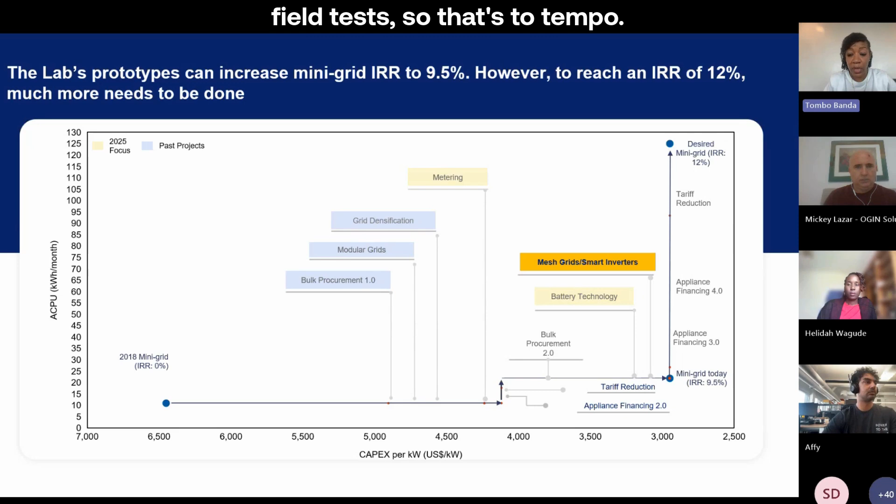So what do we do with all the data from the field tests that we conduct? We collect data from all these field tests: smart meter data, battery data, inverter data, survey data. And we conduct analysis on this data to give a real-world evidence-based view on what the impact of these various innovations is on the mini-grid business case.

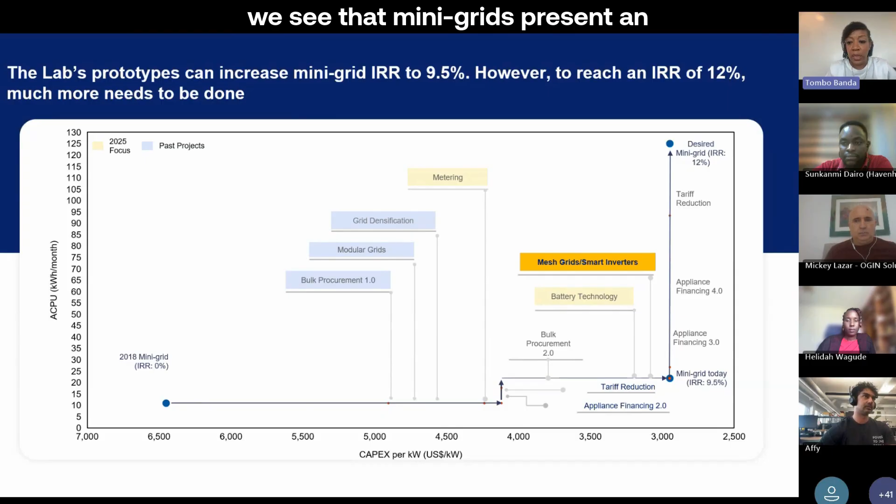Our most current analysis suggests that implementing all these various prototypes, including mesh grids, brings the mini-grid business case to an IRR of about 9.5% today, which is closer to our target of 12%. We have set a target of 12% so that mini-grids are on par with other infrastructure investments. So, while we're not quite where we need to be, we see that mini-grids present an opportunity for further improvement and bring us closer to a more lucrative business case overall. So today we hope to take you through our findings from mesh grids, and discuss how these might further impact the mini-grid business case. Thanks.

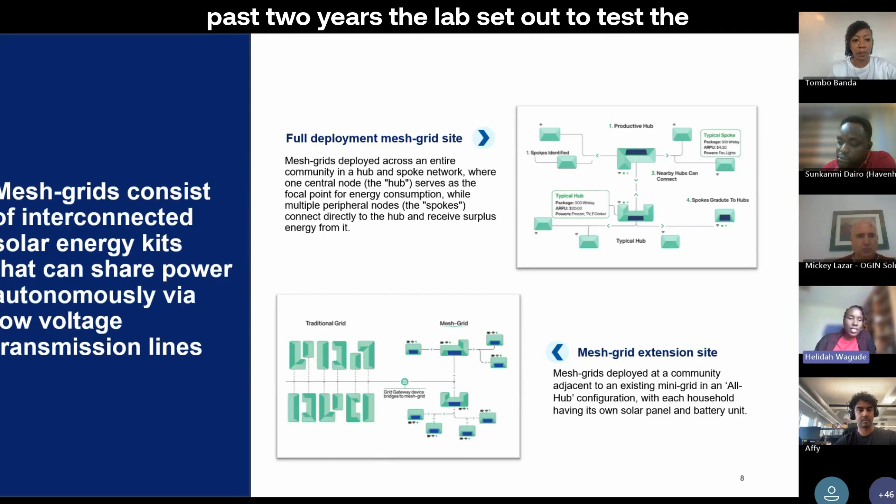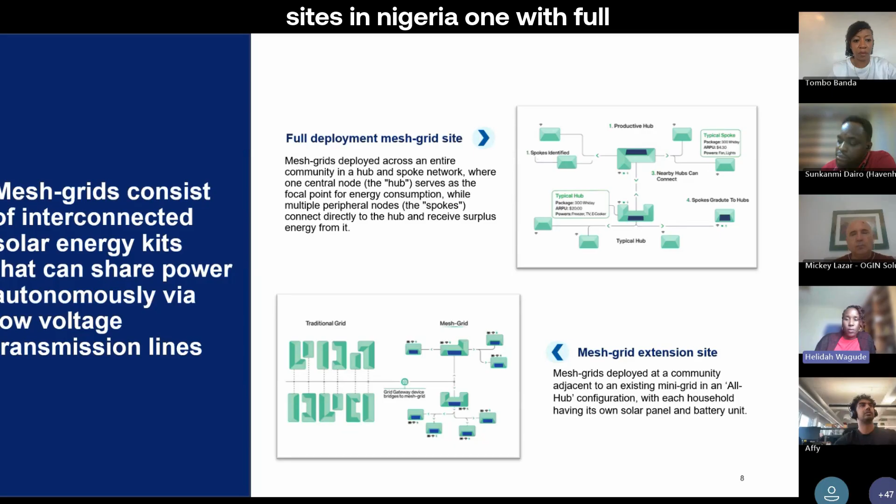I just wanted to take you through an overview of what mesh grids are and what they consist of. So in the past 2 years, the lab set out to test the technical and financial viability of mesh grids, and we compared them to mini-grid deployments of similar scale. So we ran pilots at 2 sites in Nigeria, one with full deployment of mesh grids across an entire community.

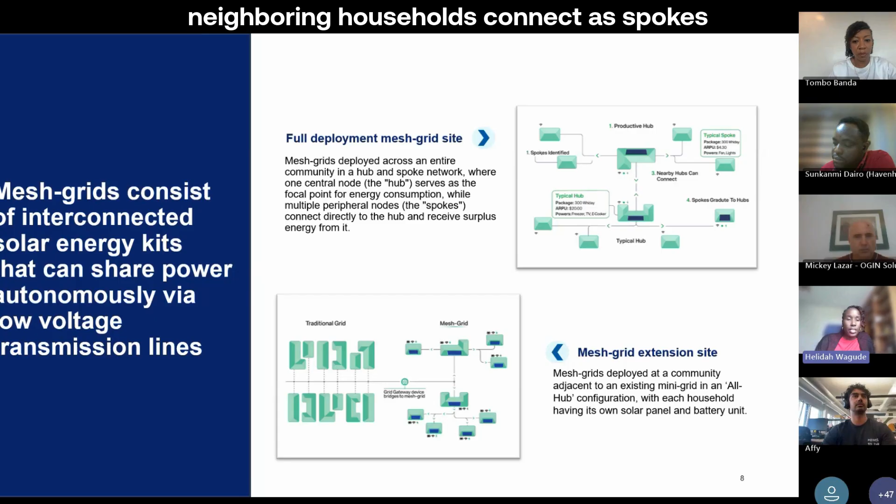And here we used a hub and spoke model where the hub serves as a central node and supports high energy users like shops and clinics, while neighboring households connect as spokes, as they typically use less than 1 kilowatt hour per day, mainly just for lighting and charging small appliances. Then the second site that was tested used mesh grids to extend access to a community at the edge of an existing mini grid, and each household had its own panel and battery system.

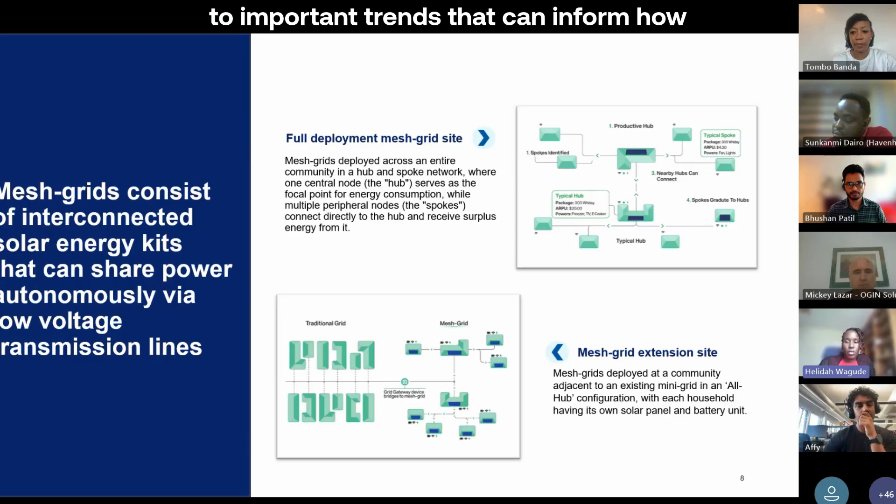While this is a limited sample size, the findings we felt pointed to important trends that can inform how developers, funders, and policymakers think about where and how mesh grids might be a viable solution. Both mesh grid sites were launched as alpha tests between 2023 and 2024. And over this period, the lab worked closely with the developers and technology partner to collect operational data, including ACPU, average consumption per user, average revenue per user, reliability, CapEx, and OpEx per connection. So these particular metrics were to better understand how mesh grids perform in practice.

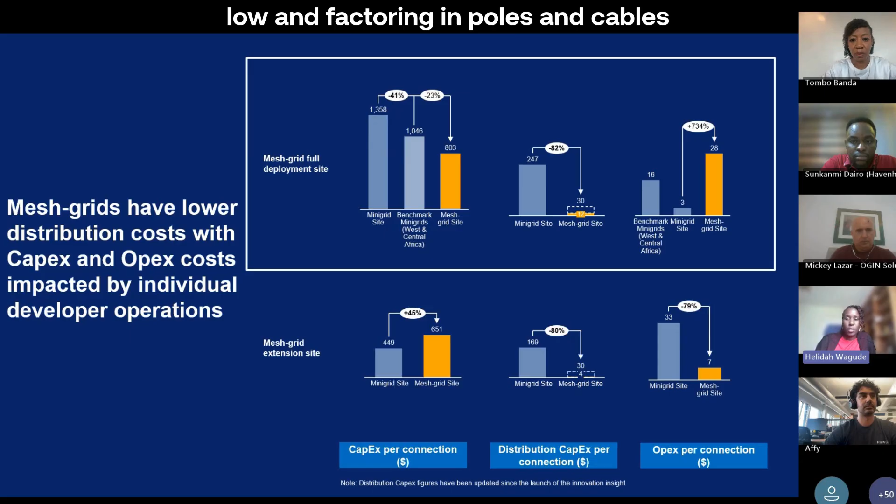So taking you through the findings of the different sites. At the full deployment site, CapEx per connection was lower than at the mini-grid site. And we also noted that it was 23% lower than mini-grid benchmarks in West and Central Africa. This is from the latest AMDA report. Distribution CapEx was also low, and factoring in poles and cables, the true cost is around $30 per connection. OpEx per connection was higher at this site compared to the mini-grid control, and this was largely because the site required dedicated maintenance resources, which hadn't yet been optimized given that it was a relatively new site.

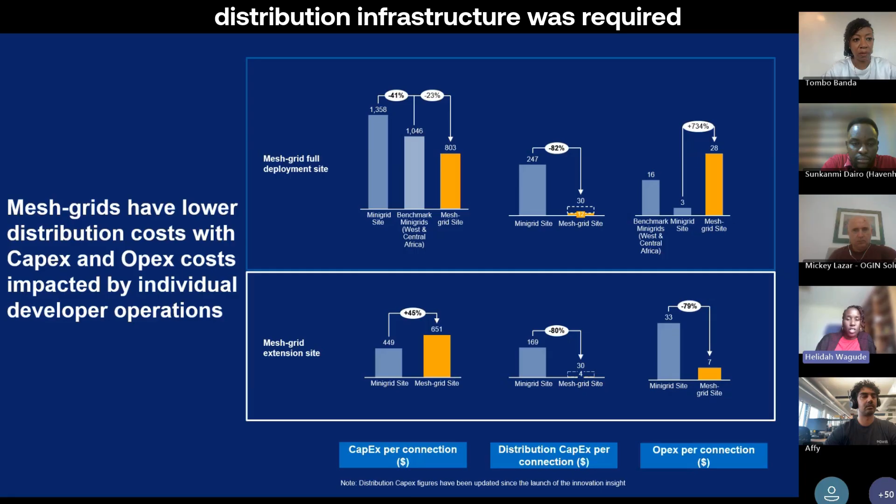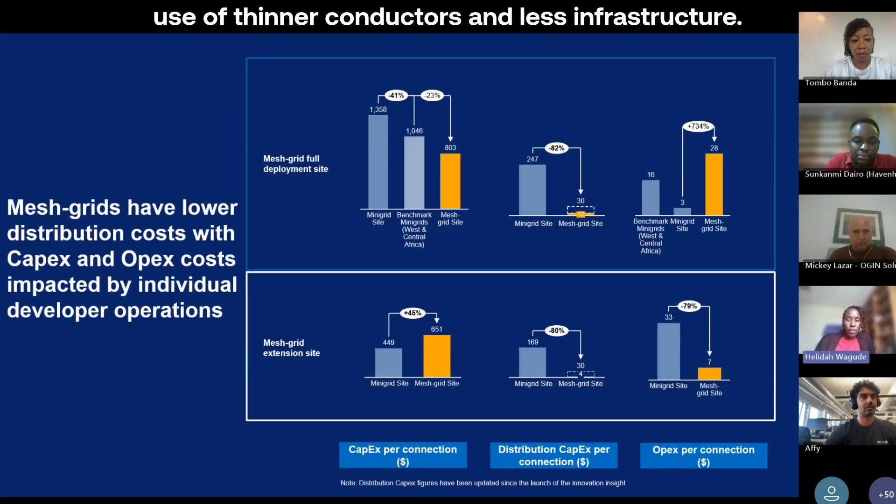In contrast, at the extension site, CapEx per connection was higher than at the mini-grid site, and this is because the mini-grid site already had existing PV and battery capacity, so only distribution infrastructure was required. The mesh grid extension site also had lower distribution CapEx, and this is driven by the use of thinner conductors and less infrastructure. OpEx per connection was also lower thanks to shared operational services with the nearby mini-grid, considering this was the same developer.

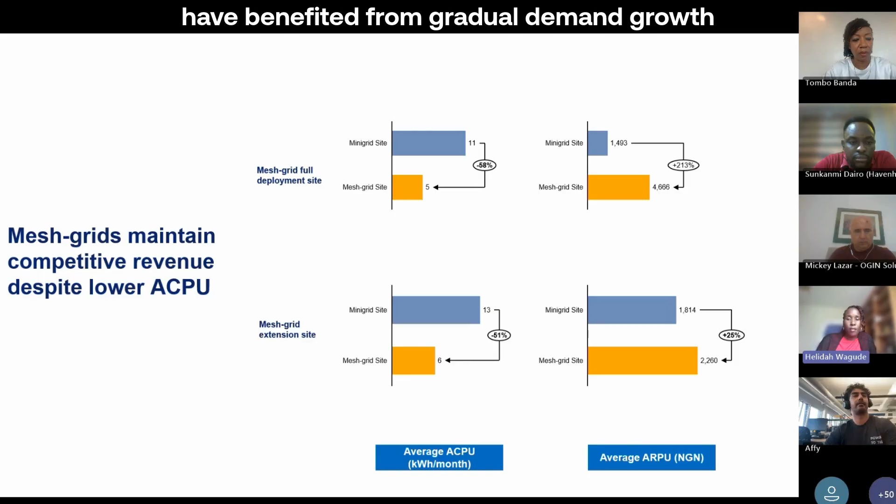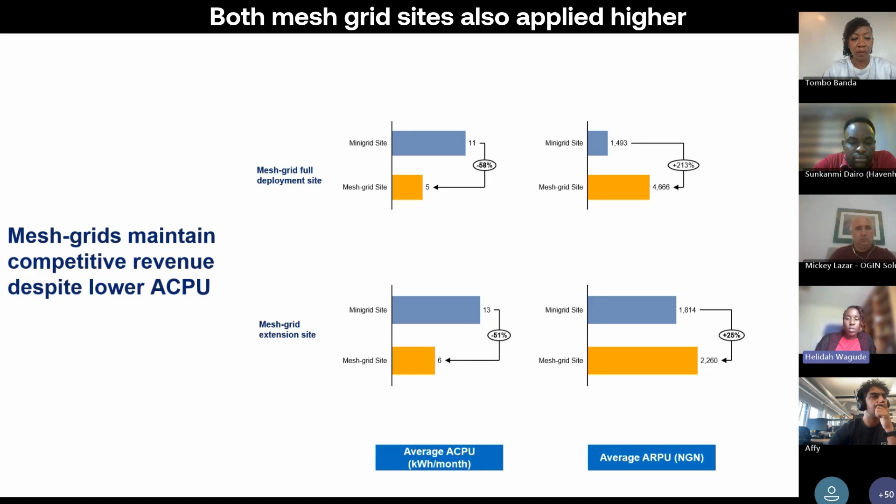When it comes to ARPU and ACPU, both mesh grid sites maintained competitive revenue despite lower ACPU. The mini-grid sites, having operated for a longer period, have benefited from gradual demand growth over the years and are better positioned to support productive use or income-generating activities. So this typically drives higher consumption than what we currently observe at the mesh grid sites. Both mesh grid sites also applied higher tariffs than the mini-grid sites, and this is largely because mesh grids in Nigeria still remain unregulated, while mini-grid tariffs are capped by regulator-approved rates. So that gives developers more pricing flexibility to recover costs and improve margins.

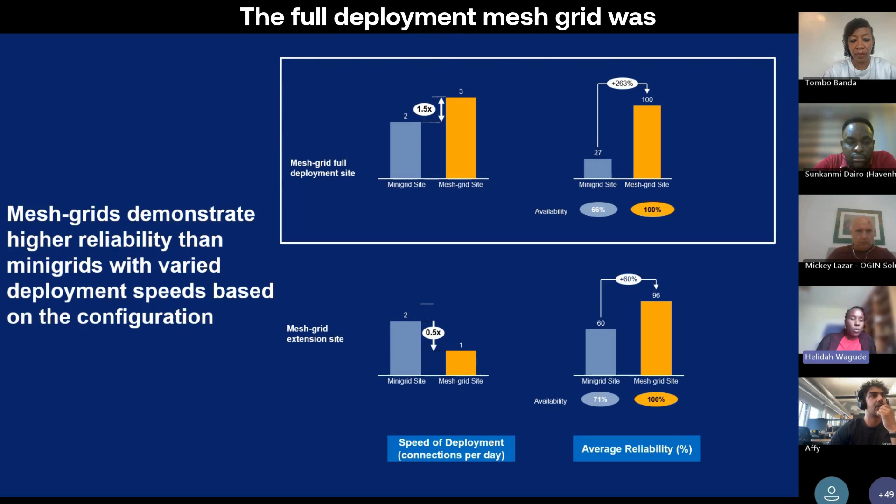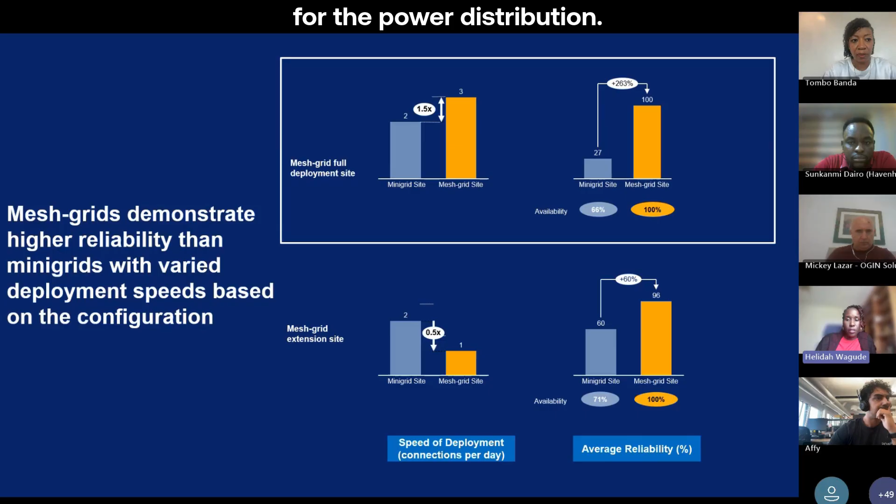When it comes to the speed of deployment, it was noted that the ability to deploy mesh grid connections varies according to developer operations. The full deployment mesh grid was generally faster to deploy compared to the mini-grid control site because panels, batteries, and pods are installed on individual houses without the need for extensive infrastructure for the power distribution. In contrast, the slower deployment speed observed in the extension case reflects the added complexity of the mesh grid extension site configuration, where each household has a PV panel, and this can impact the installation and commissioning process.

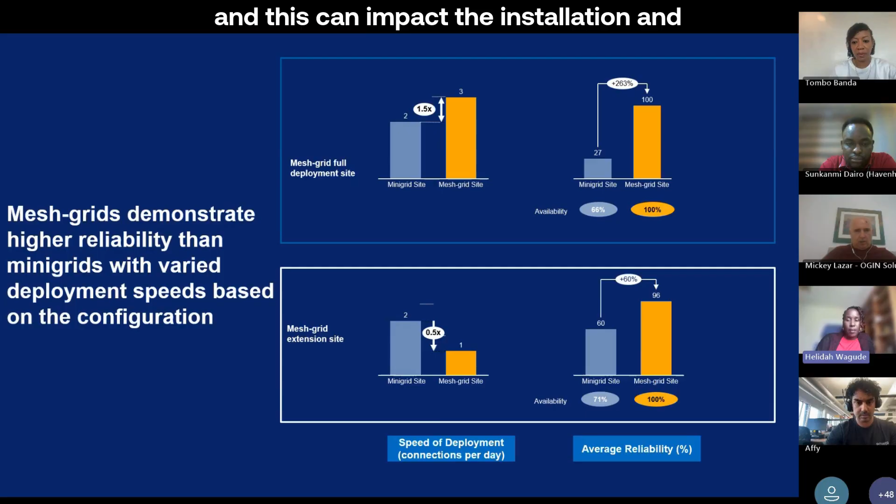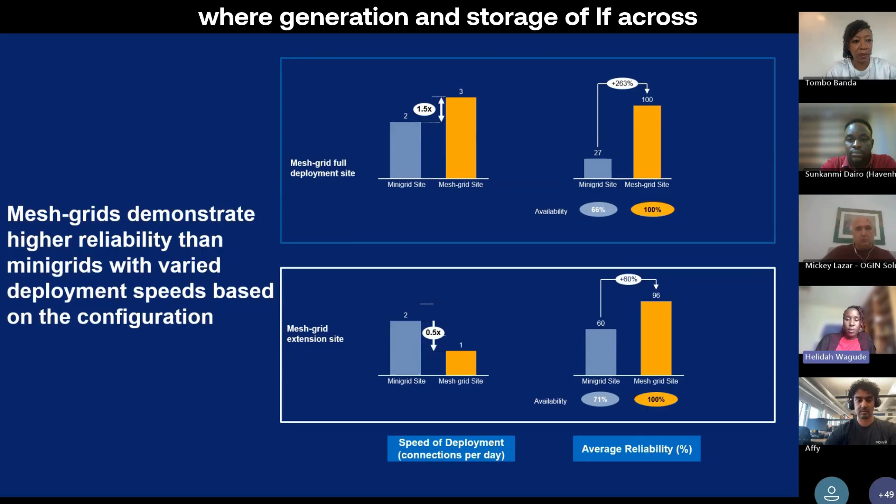When it comes to the reliability, an encouraging finding was around this, where both mesh grid sites achieved over 96% reliability. This is largely due to their decentralized design, where generation and storage is distributed across multiple nodes. So local outages tend to be contained and don't result in full system failure.

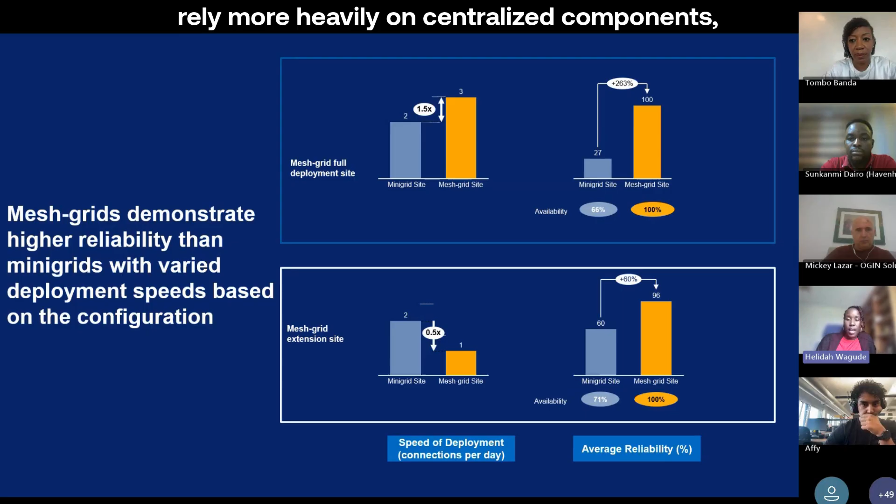Mini-grids, on the other hand, rely more heavily on centralized components, like batteries and inverters, which become single points of failure. The longer operational history of the mini-grids, where we have 4 years and 15 years for the different sites, also means they are more susceptible to wear and tear compared to the newer mesh grid sites. That said, the mini-grid sites did report high reliability above 93% during their first 6 months post-commissioning. So it will also be important to continue monitoring how mesh grid reliability holds up over time.

We thought we'd look at a case study of mesh grids which have been deployed in Haiti since 2021. So with more than 46% of households in Haiti lacking access to electricity, many communities remain entirely off-grid and rely on wood, charcoal, candles, and kerosene lamps for basic energy needs. Alina Energy launched this mesh grid project in the rural community of Marchand Dessalines and has been expanding to other locations.

Alina Energy is demonstrating how innovative decentralized energy solutions can bridge Haiti's energy gap faster and more affordably than conventional infrastructure. The site has demonstrated quite high uptimes and reliability of over 98% through this period, while keeping cost per connection low at $545 per connection and charging tariffs that are over 90% cheaper than what customers pay in informal charging stations.

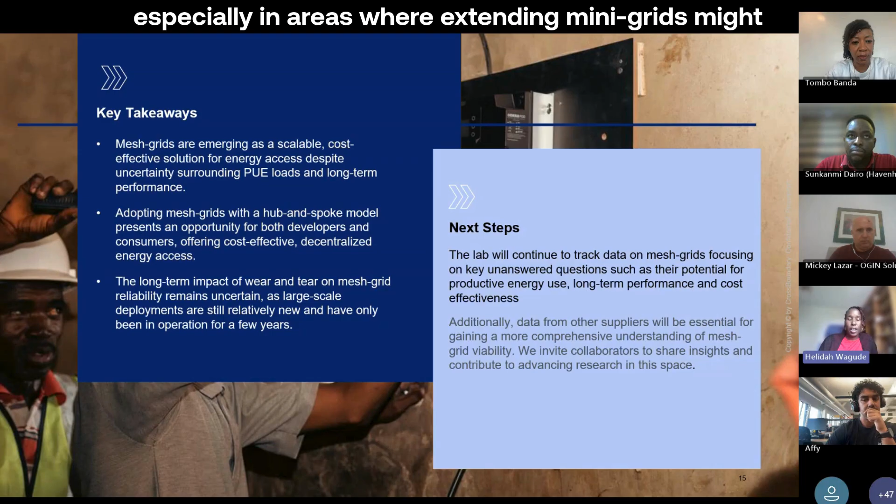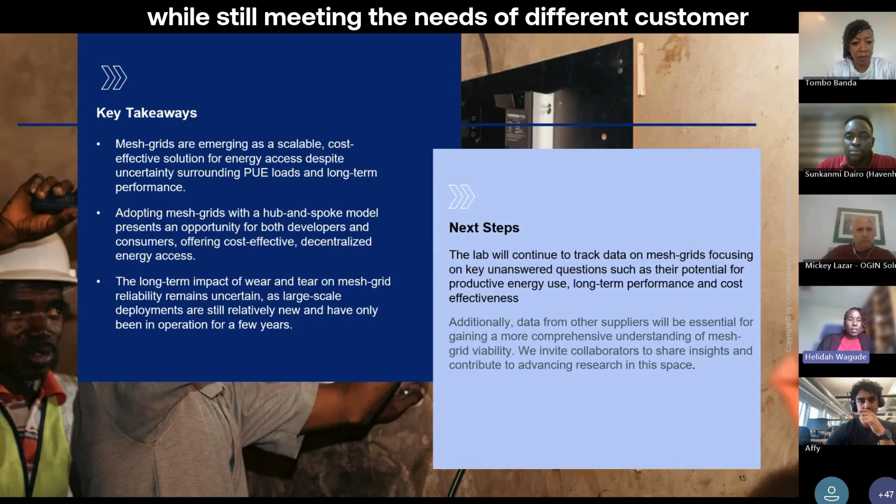So we now want to just highlight some of the key takeaways and opportunities for collaboration that we see as the lab. In terms of key takeaways, we're seeing that mesh grids are emerging as scalable and cost-effective solutions, especially in areas where extending mini-grids might not make sense. The hub-and-spoke model is also proving to be an efficient way to extend energy access, as it provides flexibility for developers while still meeting the needs of different customer types.

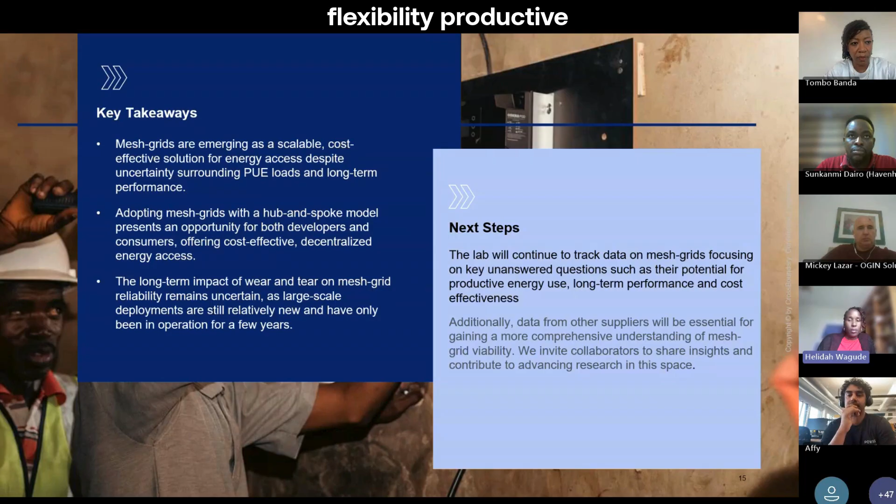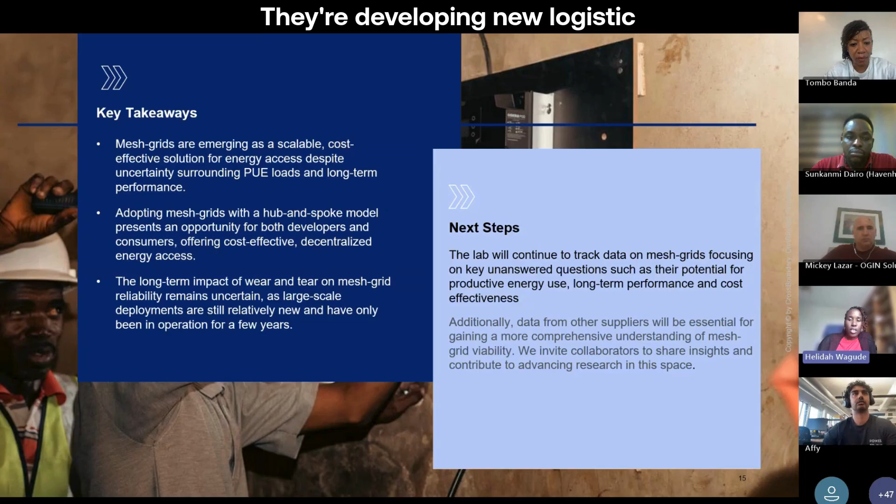The ability to provide sufficient power for productive use of appliances is also being tested, as the typical individual system provides around 1.2 kilowatts, while high-power machinery such as grain mills would need around 2 to 6 kilowatts, which exceeds the capacity of standalone mesh grid systems. And finally, we're also looking at their performance, which has been promising, but we'll need to continue monitoring the long-term reliability and durability of mesh grids.

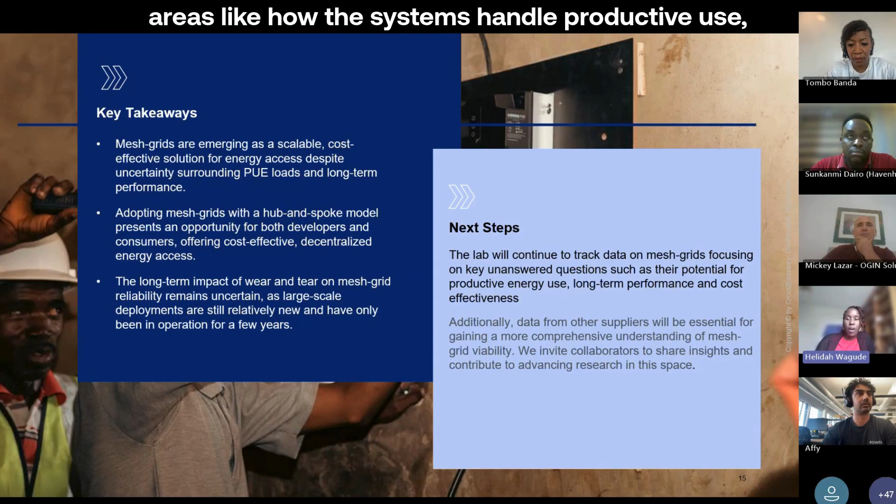So looking ahead, the lab is continuing to track performance data on mesh grid systems, especially around key questions and areas like how the systems handle productive use, what their cost effectiveness is over time, and how reliable they are as they age. So we do invite more collaboration, as we believe there's huge value in bringing more data from other partners and participants in the field.

So for our next section, we'll be entering into where we listen to developers, technology partners, and investors who will be sharing their insights while working with mesh grids. So for the developer viewpoint, the first developer call up is from Engie. That will be Chima and Matilda. Maybe you can start with introducing yourselves, then we can jump into the questions.

Thank you, Helidah. My name is Chimobi Meyer, now at AMDA as the regional coordinator for West and Central Africa. But before joining AMDA, I worked at Engie Energy Access, where I was the project manager of this project from the beginning to the end. Yeah, thank you. Very happy to be here.

Okay, thank you so much, Chima. So we'll jump straight into the questions. The first one we have for you: we would really love to know what your experience was installing mesh grids on your site. Yeah, so I've been very fortunate to have been involved in the deployment of many projects here in Nigeria, from the mini grid to interconnected, as well as undergrid mini grid.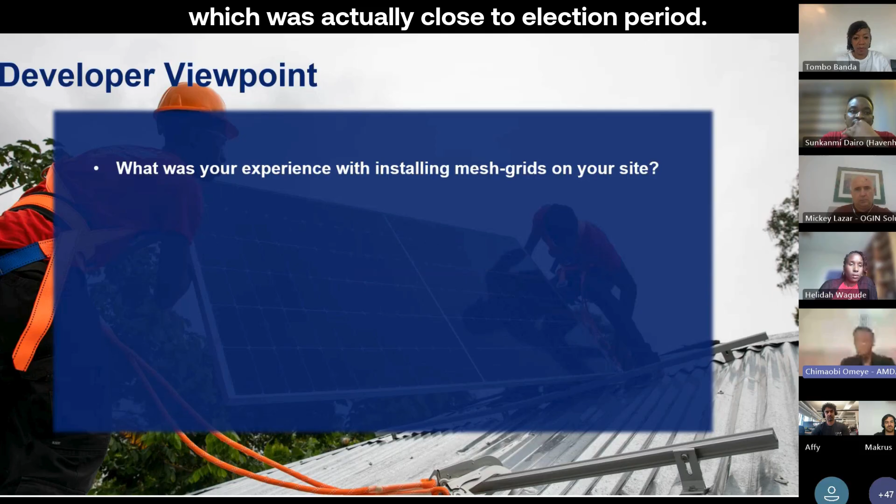But I can also say that this particular project was challenging in the sense that it was the first, more like a pilot that the company was doing at that particular time. So it was challenging and also a bit dynamic, considering the time factor, because Nigeria was more like at a transition period. The conversation started late 2022, and we started deployment early 2023, which was close to election period. So there were a lot of issues, sincerely speaking.

But due to our fantastic relationship with the lab and also with the technology partner, Okra Solar, we were able to navigate all the challenges. And I can beat my chest and say that it was a record-breaking one, because what we expected, we matched it and even went above and beyond when you look at the timeline, and also when you do the comparison with the challenges that we faced. So I can say it was a great one.

A lot of learnings came with it, being the first mesh grid project by the company. So we were able to navigate all of them. It was challenging, but a great one at the end of the day. Thanks, Chima. So for the next one, we just wanted to know how your team managed customer engagement, and did you need to educate communities prior to connecting mesh grids?

Yeah, definitely, which is associated with rural electrification, any rural electrification projects. I think that's one of the most important steps that you must follow: stakeholder engagement, because you're speaking with people that are not so educated. So you have to lower yourself down, right? Look at the language barriers. I think that's one of the most important sides of it.

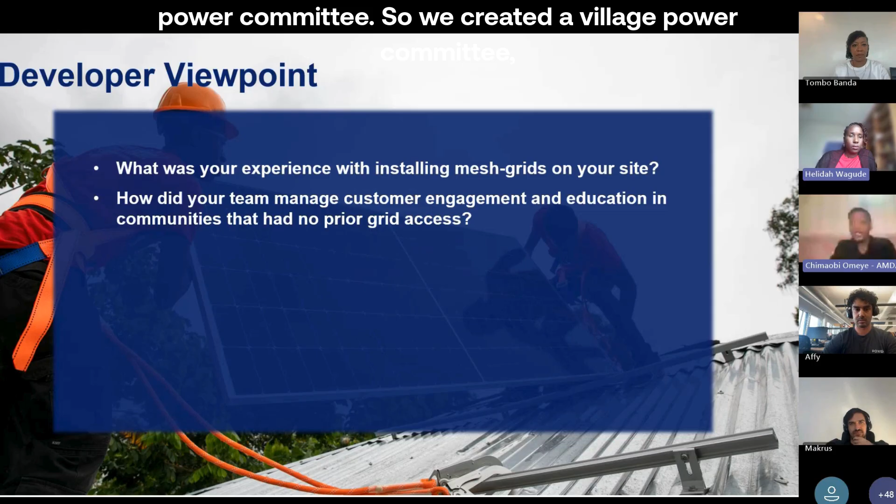We started from the local council, where we discussed with the government at the local level. Then we went to the village chief, and then we try to form a village power committee, whereby we don't have to speak to all the villagers, but to the committee, so that it will be more efficient. So we created that committee, and the collaboration and engagement was straightforward, very clear. They accepted us in good faith, and the deployment was carried out.

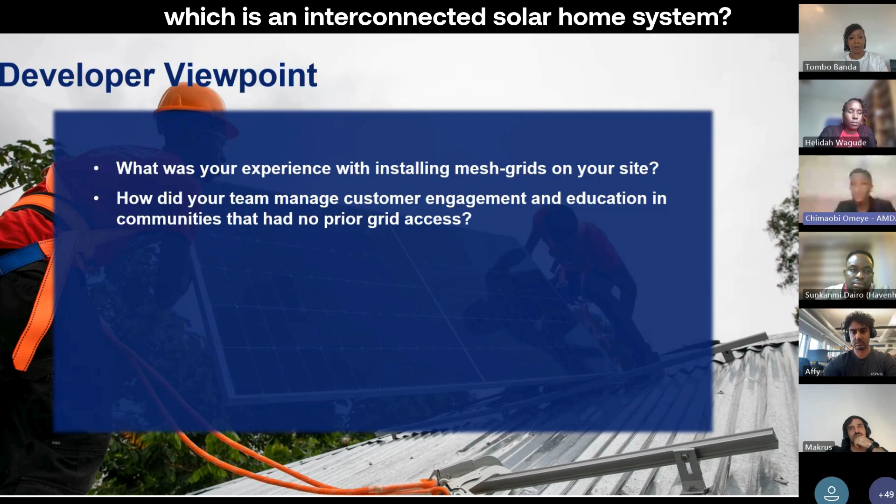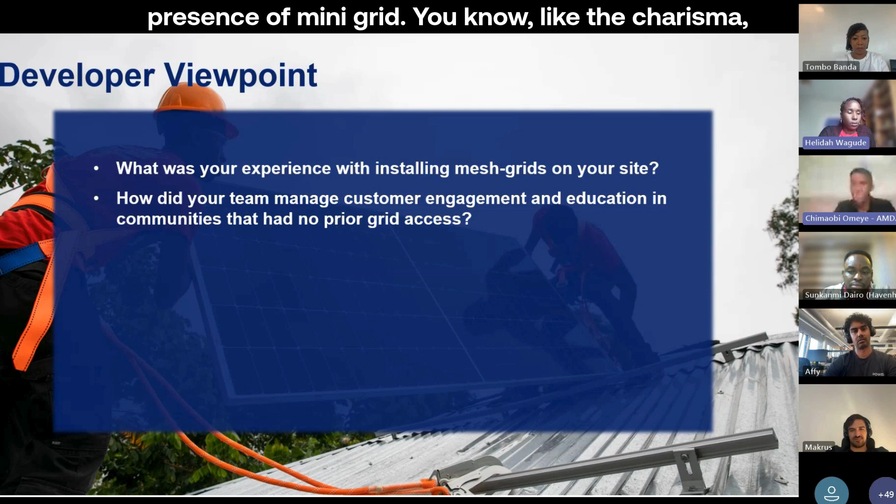Just one or two grievances that we noticed, because remember this was a study test. Questions were raised: why are you coming with a mesh grid, which is an interconnected solar home system? Why don't you give us the mini grid that we are seeing 10 kilometers away? In terms of appearance, they are more appealed by the mini grid, the charisma, in Nigeria we call it packaging, right? That's why you have to engage further. So we engaged to convince them, and at the end it has been a very fantastic project.

And I must also give thanks to Malam Abubakar, the village head, a very fantastic chief. He gave us his support. He was one of the first people that paid the connection fee and accepted us to connect his household, and he paid immediately. That was a morale booster in the village, where if they see their village chief connecting, then they have to connect, right?

And we also try to have a sense of gender balance, where we made it a must that there should be women representation. Because in the Nigerian local setting, looking at the cultural context, you have to follow some procedure, but we were able to get a balance. The village women leader was part of it, just to make sure that all the necessary stakeholders are carried along.

Yeah, thanks, Chima. So on to our next one. We could handle these two at the same time to save time. Are there specific factors such as geography or community size that you feel make mesh grids more or less viable? And you did already highlight the challenges you were facing with deploying mesh grids.

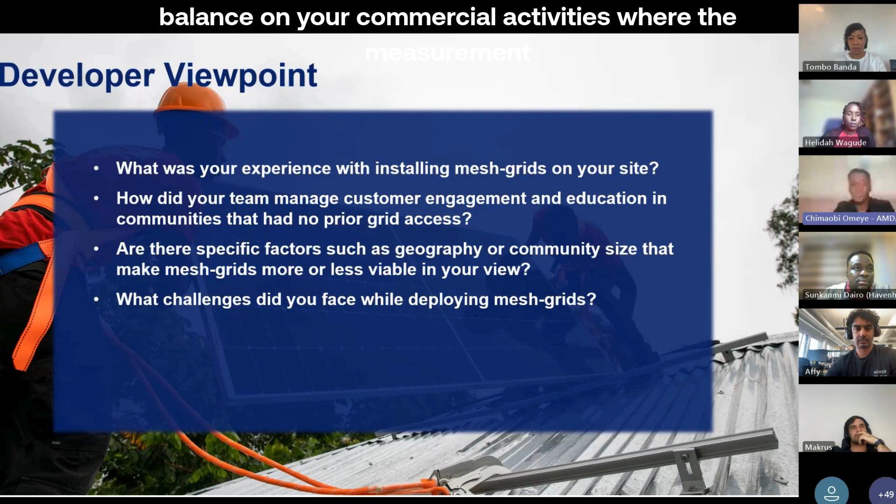Yeah, so I think you have to look at other factors where maybe security is another key factor. Communication, telecommunication, because there has to be communication across your site, be it mini grid or mesh grid. So we make sure that we have a telecom mast, either MTN or Airtel, anyone, but let it be there, no matter how low it is. There is always a way to navigate. Then find a balance on your commercial activities where the mesh grid technology can be able to power.

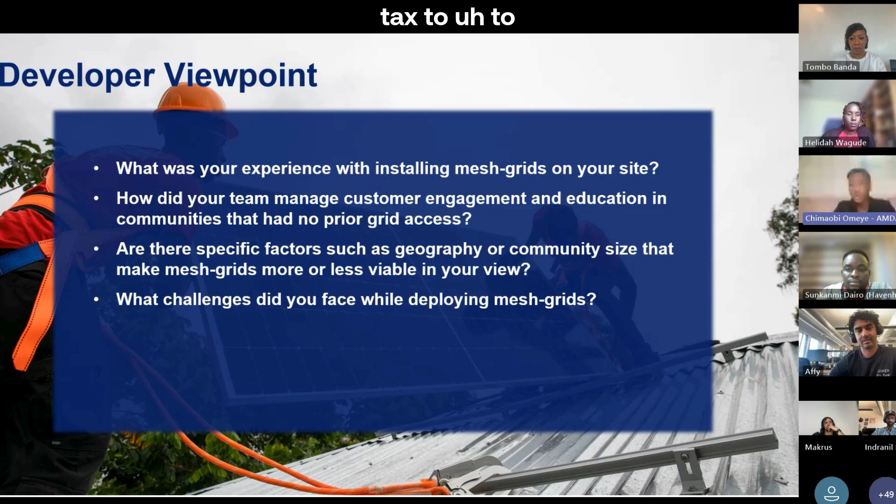So I think it's a very, very important aspect to look at, because once you get it wrong, I think it will be a very difficult task to change at the end, because we are looking at profitability at the end of the day. I don't think there is any business just going to dance rather than to make money for the stakeholders.

Yeah, thanks, Chima. And on the challenges, like I mentioned, our deployment came at a period of time when Nigeria was entering into a new government, the government of President Bola Tinubu, right? It was around that period. So I don't know if my fellow Nigerians can remember that there was a very critical issue then, which was the absence of Naira. Suddenly, Naira disappeared. It was funny, but many say that it's politically motivated. I don't know, but there was scarcity of Naira back then. So it was a very big challenge, right?

We tried to figure out the ways, because if you don't have cash in project development, it's always difficult, because even if you try to look at digital payment, remember that you have local staff in the villages that you have to also pay. There are some payments that you must make in cash, right? Then also challenges on transportation at the port. It was difficult, and I must give kudos to the Okra Solar team. We faced it as a team, and we were able to cut that down in a very fast manner. So I think these were the two major challenges.

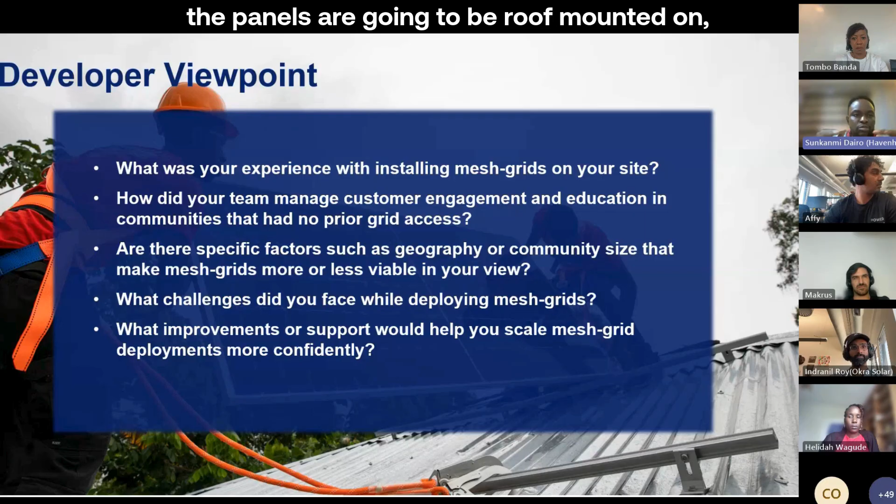Because with mesh grids, the components are going to be installed at each consumer's location. The panels are going to be roof mounted on residences or the shops of our customers. We had to inform the customers, get their consent to install the solar panels, and as well reassure residential customers that are still in the cluster that regardless of whether or not the panels are installed on their roofs, they would still be connected to the closest installation. So that was how we conducted customer engagement at our mesh grid sites.

Now, on to the next question about the specific factors such as geography or community size that make the mesh grid more or less viable. Well, just as Chima said, one thing that can improve the viability of the mesh grid is to ensure that the systems are designed to power productive use customers. So it's important that this is taken into consideration in the improvements that are planned for the mesh grids. One other thing, and I'm just going to merge this with the challenges.

Yeah, thank you, Afnan. So our first question for you was, we just wanted to know, what are the operational or deployment challenges you've observed across different regions, knowing that you've worked in Nigeria, Haiti, and many other places, and how has your technology adapted? Yeah, for sure. So I think we touched on some of them here, and this is actually a great forum to get more feedback and insights, because we're always trying to improve the technology.

So I think it was mentioned by Chima that mesh grids are basically interconnected solar home systems. The reason why it's been built this way from the start is that by consuming most of the power where it's generated and only sharing the excess energy between one system to the next, we can take distribution costs down by about 90%. So that was the main premise of the mesh grid. Let's put all the money into batteries and panels and not into distribution.

But one of the things that we observed when we deployed in Haiti with Alina Energy is that, so I'll give you guys some data, there were about 5% of users who were using more than 15 kilowatt hours a month. And these were really the commercial or the profitable consumers to reach. Then there was another 15% of users using more than 5 kilowatt hours a month. And they were basically break-even or slightly profitable users.

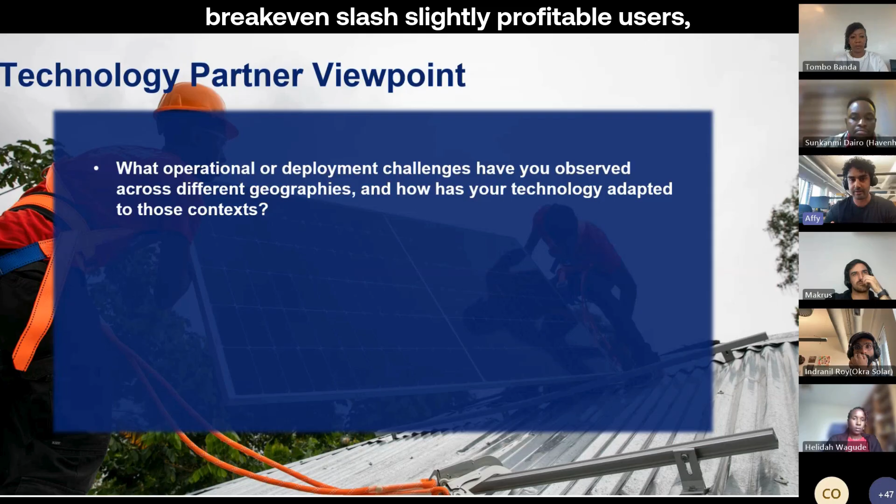But then there were 80% of users who were using less than 5 kilowatt hours a month. And they were therefore basically loss-making users. So a couple of years ago, after we observed this data, that's when the hub and spoke topology came out.

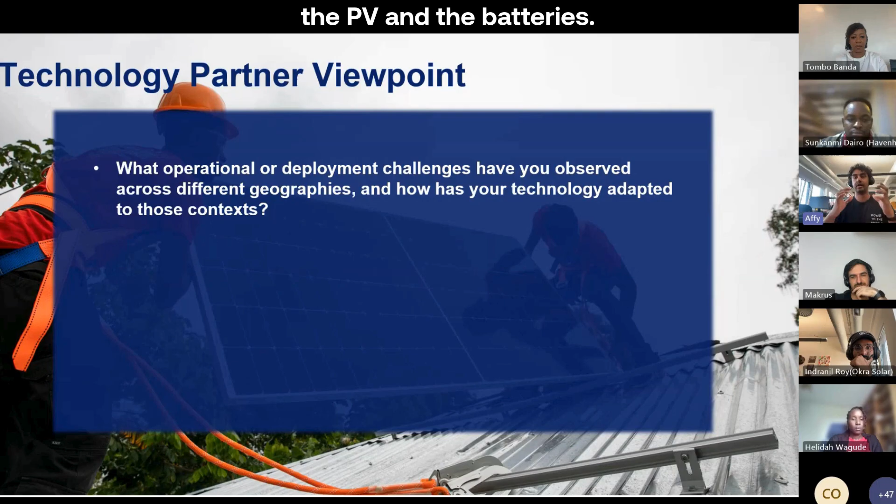So we're like, okay, let's just place the assets, the PV and the batteries, on the 5% of users that are going to be commercial users, that are profitable users, and then take the excess energy out to what is now the spoke users, the residential users that have very low load. So the connection cost to them is just a little bit of cable and a smart meter. So it's within the tens of dollars to connect those users, which makes them profitable to serve. So that's one of the lessons.

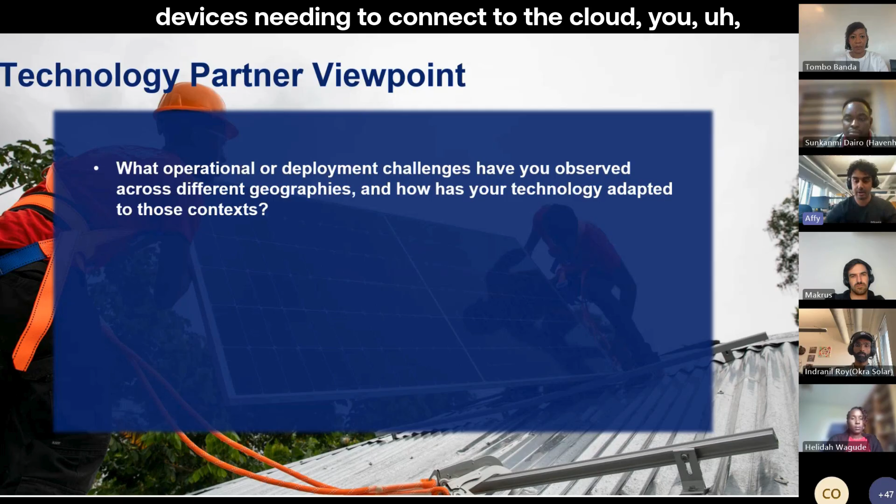And then another big one, which was highlighted, I think, by Sunkami, is the connectivity challenge. We've seen this in Haiti as well. So with all of the smart devices needing to connect to the cloud, in places where there's no reliable connectivity, you actually have significant revenue losses. In Haiti, we've seen more than 30% of the revenue dropping just because the devices aren't connected. So that's really, really bad for our customer, Alina Energy.

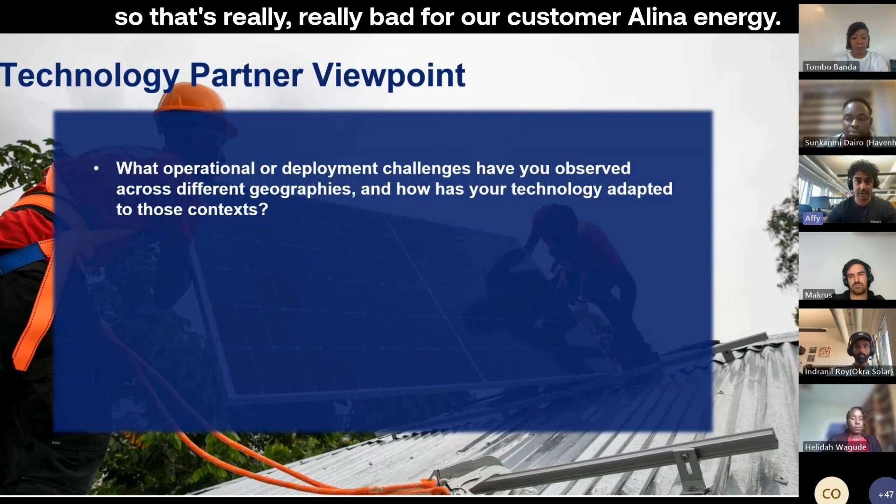And what we've done is we've created a technology called OkraNet, and it leverages radio on every single device. So if any device isn't online, it can hop that data to the next device, and there only needs to be basically one area in the community which has connectivity, and then you can send that data up into the cloud. So we've addressed that issue now going ahead.

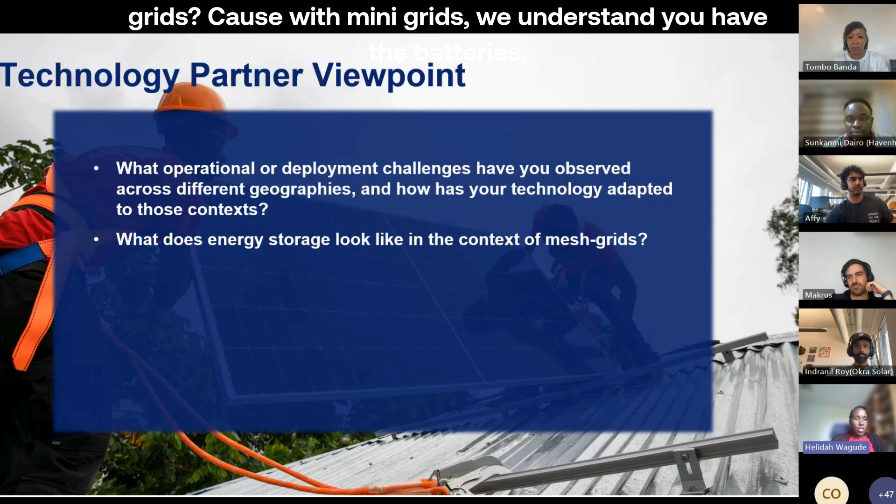Awesome. Thank you so much, Afnan. So the next one was from one of our participants who was just curious. What does energy storage look like in the context of mesh grids? Because with mini grids, we understand you have the batteries, you have the diesel generators. What does it look like in mesh grids?

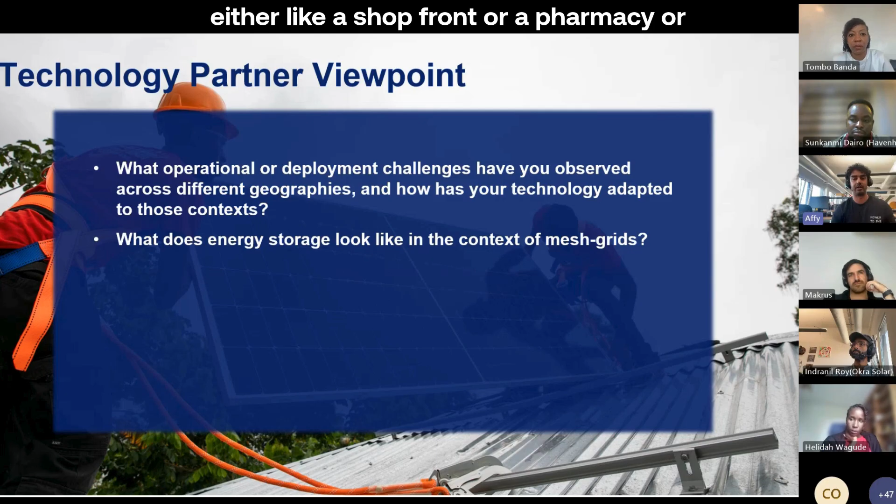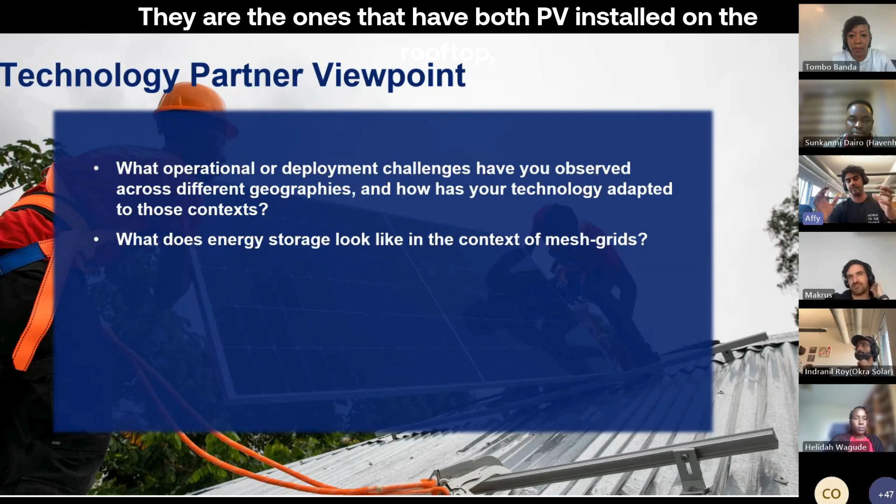Yeah, great question. So going off the hub and spoke analogy that I shared with you, there's a commercial user, approximately 20% of users in the community, that are either a shop front or a pharmacy, or they're just consuming enough energy to really make it worthwhile to connect them. They are the ones that have both PV installed on the rooftop, but also a battery. Currently, we're optimizing around 1.28 and 2.56 kilowatt hour LFP batteries.

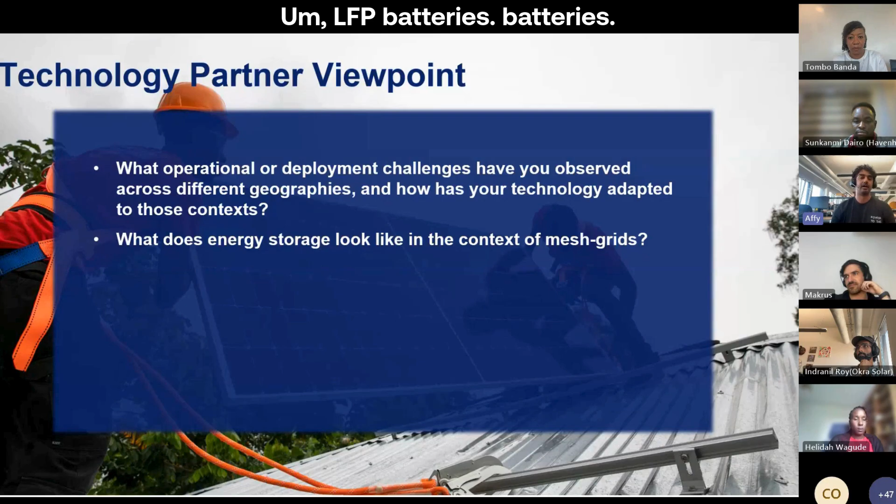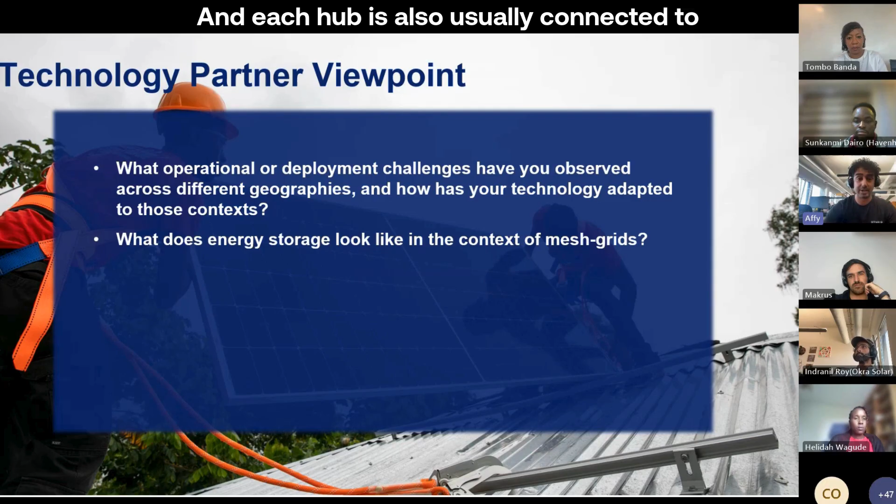So there's a battery installed at these what we call hub connections, and that will connect through with a cable to the nearest hub connection as well. So whenever there's excess energy at one hub, it'll share it to the nearest hub. And each hub is also usually connected to about 4 residential consumers nearby who only take excess energy, but they don't supply any energy because they don't have any batteries on the premises.

Awesome, thanks. And on to our last question. We just wanted to know what future upgrades or innovations Okra is exploring. I know you're doing the stacked pod system. What are you looking at to support more PUE, growing loads, and higher capacity connections?

Yeah, nice. I can see from the discussion today that there's been a lot of mention about PUE. Also, I think Chima mentioned sub 250 connection sites are the best sites to hit. And obviously with mesh grids, we don't want to just drop the cost or just make it easier to deploy. To quote Chima, the business is not there to dance, it needs to make money. And if the productive users are going to be making the developers money, we have to have a solution for that. So that's what we've learned from the mini grid developers, that productive use is key.

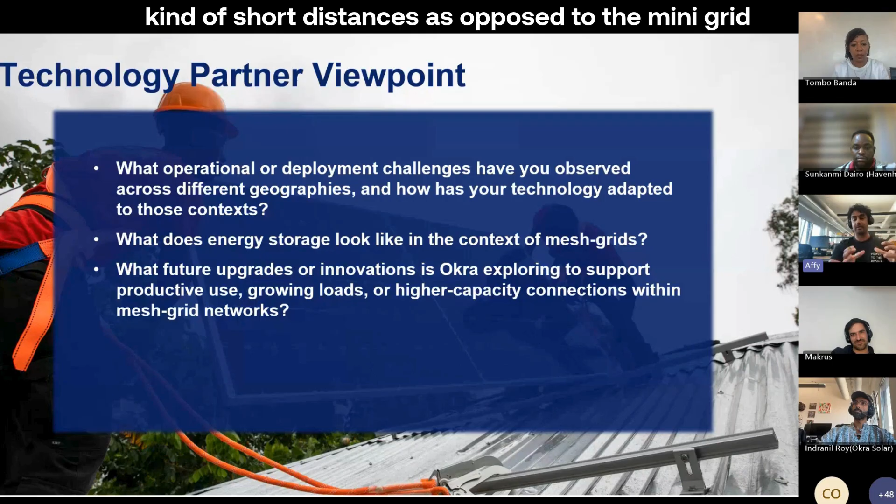And we've learned from mesh grids that we can reduce the distribution cost massively by consuming where the demand is, and then sharing over short distances, as opposed to the mini grid, which sends tens or hundreds of kilowatts down a single distribution line. So what we're doing going ahead to address this is, actually before that, I'd also like to mention on the productive use side, while the mini grid has a lot of benefits to being able to send all of that power through the line, there are also some drawbacks.

So if your powerhouse is on one side of the community and you have productive use nearby, then that's great. But if you have a lot of productive use turning on simultaneously, then you can basically trip the inverter capacity and then the entire grid would go down. So all the connections would go down.

And then on the other side, if you have productive use on one end of the community, which is on the other end of the powerhouse, then the voltage drop could actually make it unusable for the productive use. So yeah, there's a lot of technological learnings from the deployments that have taken place.

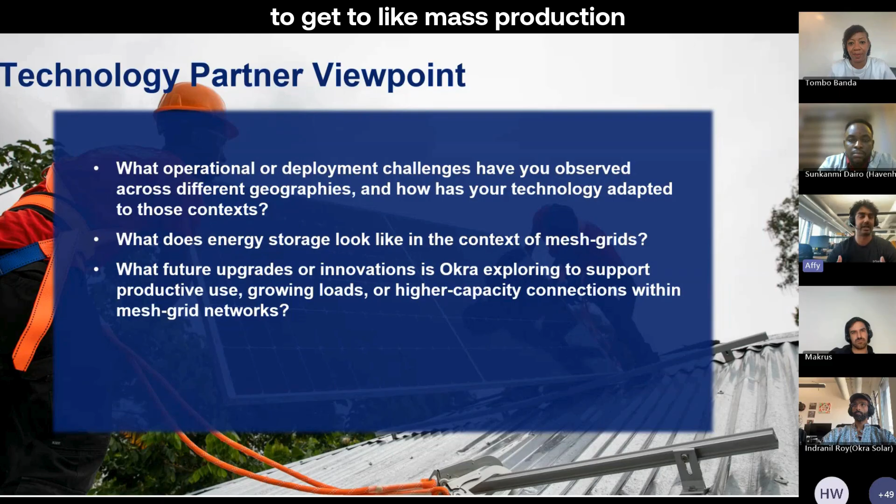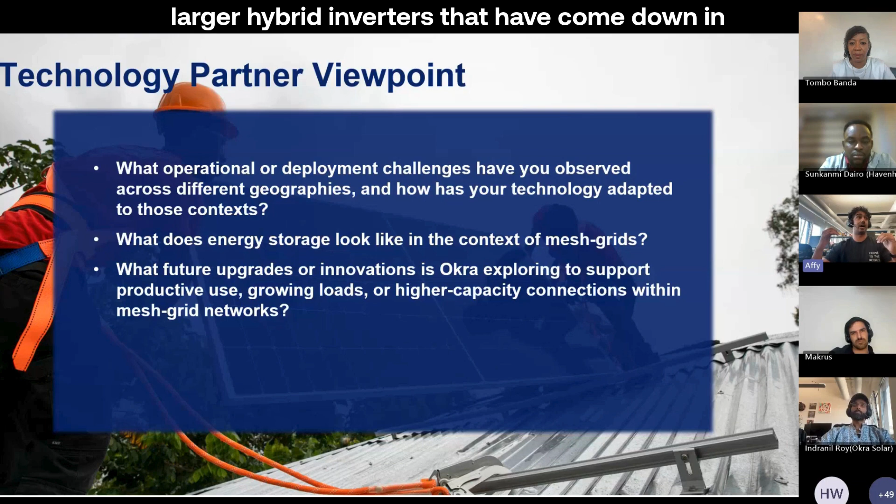So the exciting thing that we're exploring already, but it's going to take some time to get to mass production, is actually the limitation that we have of the 1.2 kilowatt inverter. We can see the market has moved already towards much larger hybrid inverters that have come down in cost point massively. There's 5 kilowatt, 10 kilowatt, 20 kilowatt hybrid inverters.

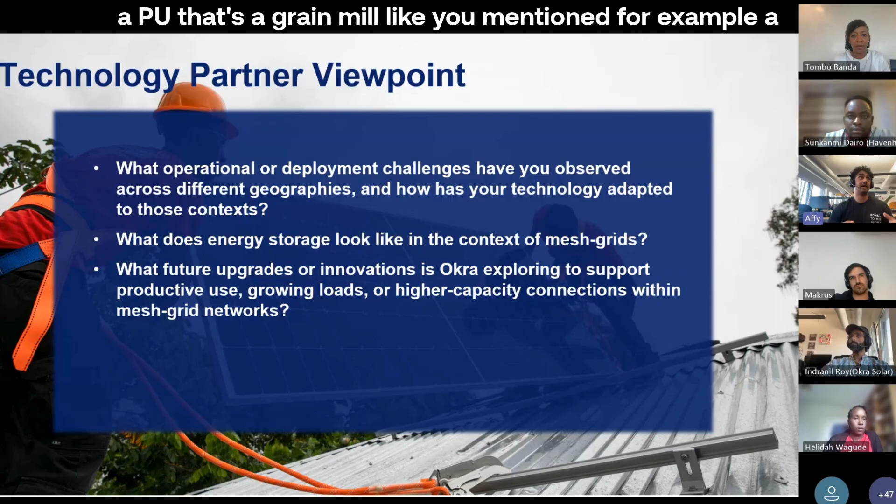So the next generation of the mesh grid that we'll be looking to deploy in 2026 will include some of these hybrid inverters. So if you've got a PU that's a grain mill, like you mentioned, that's like 6 kilowatts, then you can plug in the hybrid inverter, serving that really high productive use, and you still benefit when there's excess energy. You share it over a lighter and lower cost distribution line.

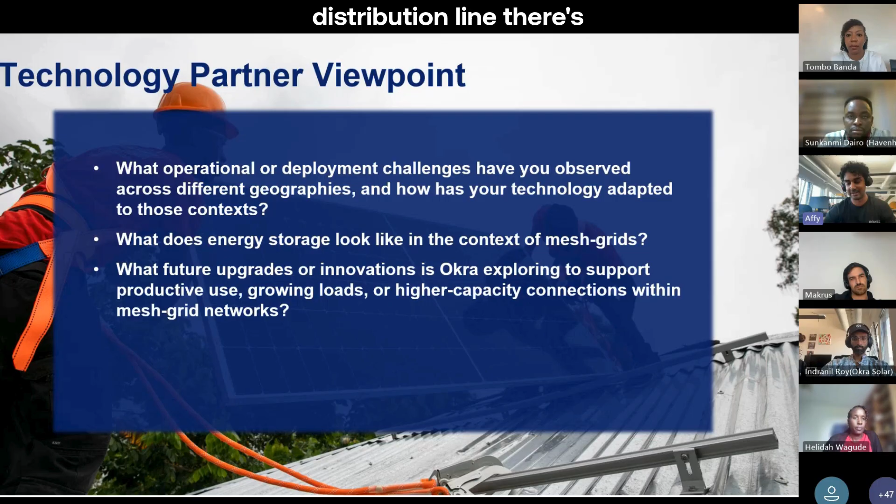There's another cool one, but I don't know if I have time to share it. So I'll... Yeah, yeah, you have 1 more minute. 1 more minute. Okay, cool.

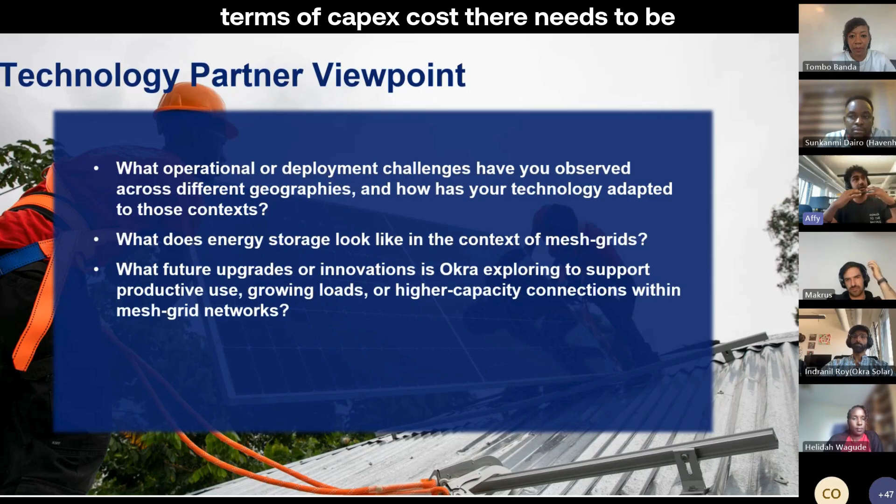So of course, the hardware is incredibly important. We need to get the CapEx down. We need to be able to serve productive use, but we can't also just have a race to the bottom in terms of CapEx cost. There needs to be ARPU that's coming in, right? And that's what the mini grid guys have done well on, focusing around productive users. What we're doing at Okra, in addition to the hardware, is software.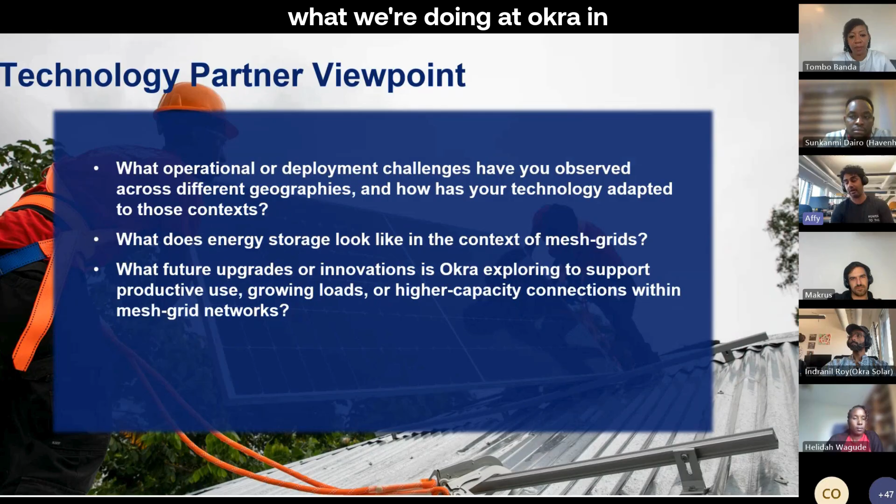So we know that about 30% of revenue is also lost from households just not topping up. So we're deploying an end user app that enables households to check their balance and top up automatically using mobile money, along with incentives on the end user app.

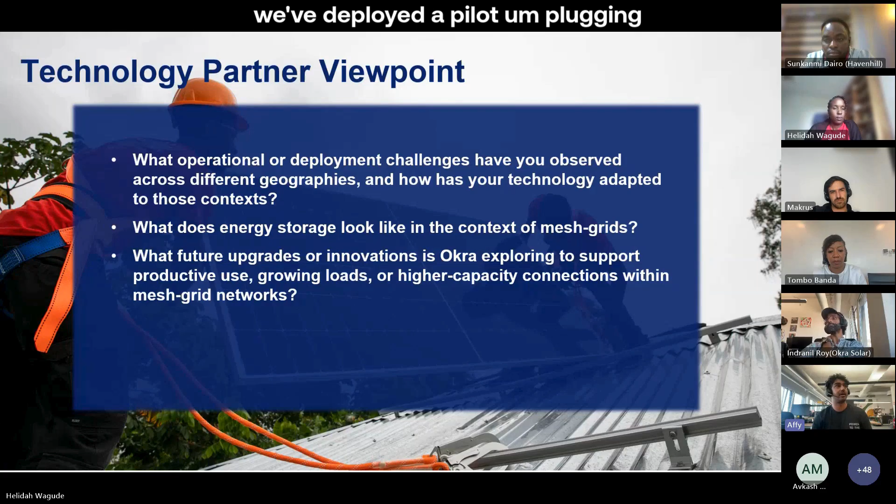And also we've deployed a pilot plugging in third-party productive use appliance suppliers into the grids that are deployed. So in a community, you can see appliances from multiple suppliers and then pick that, get it on financing, and it will get delivered to the community. So there's a bunch to do on the software side as well to keep these grids profitable and sustainable.

Awesome. Thank you so much, Affy. Thank you for the good insight on mesh grids and what's coming up next. So for our next section, we'll be moving to the investor viewpoint. And here we'll be inviting Stewart Hicks and Tombo to lead us through. Awesome. Thanks, Helidah. And Stewart, I guess you're on the line. I will hand it over to you to introduce yourself shortly.

But as you introduce yourself, I can ask the first question. We premised this discussion on the fact that for mini grids, or to provide energy access generally, if the private sector is going to be involved, these technologies have to be financially viable. Mesh grids, we see, present an opportunity for reduced cost per connection. But, as we have heard, there's a lot of outstanding factors: ability to hold higher PUE loads, changing technology around the software and updates to the cloud, and a lack of clarity around some of the regulation.

But generally, I'm optimistic because the key thing is the cost of batteries and solar panels continues to drop. The cost of distribution, poles, wires, cables, continues to increase. So the balance toward more distribution and more co-location of generation and consumption is only going to get stronger in the future. Okay, that's all from me, I think.

Yeah, thanks, Stewart. Very handy. And yes, it is optimistic generally that costs are falling, and I think developers broadly are getting better at deploying productive use equipment and understanding the community needs. So we hear from you that the evidence needed is this performance over time, how mesh grids perform, how the consumption is over time. You already mentioned the point about connectivity that Okra is already working on.

So we as a lab will continue to work with our partners on this, and as Helidah said, we'll invite everyone on this call to collaborate with us on that. But with that, I can hand back to Helidah. I think the next phase is questions from the audience, which I'm sure there are many. So Helidah, back to you. Yeah, thank you so much, Tombo and Stewart, for freestyling. So let me jump through your questions. I think you covered everything very well.

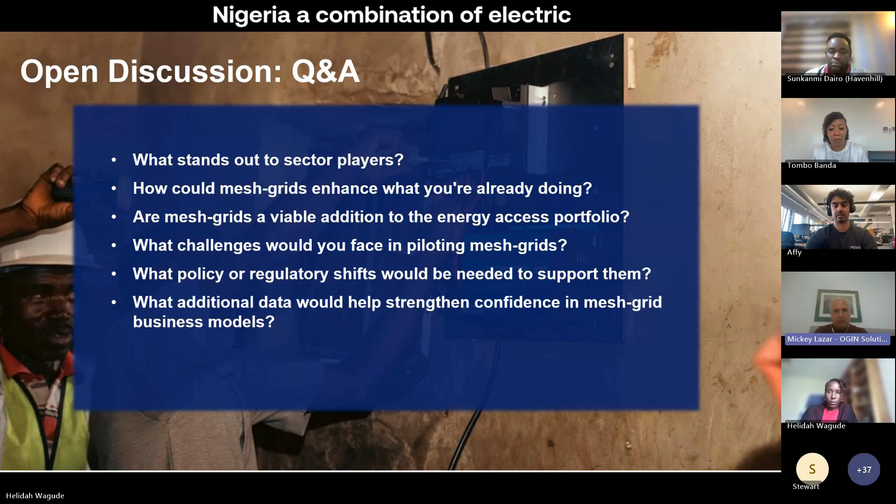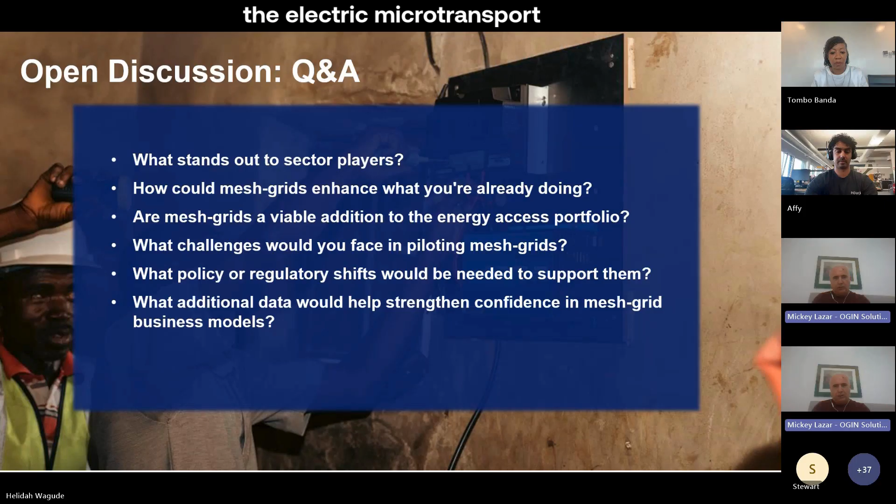Good afternoon. My name is Mickey Lazar, Director with OGIN Solutions Limited. We started to promote in Nigeria a combination of electric microtransport, the keke, as the Nigerians know it, in connectivity with the mini grids. From our assessment, the electric microtransport can be a substantial anchor, creating a base load demand

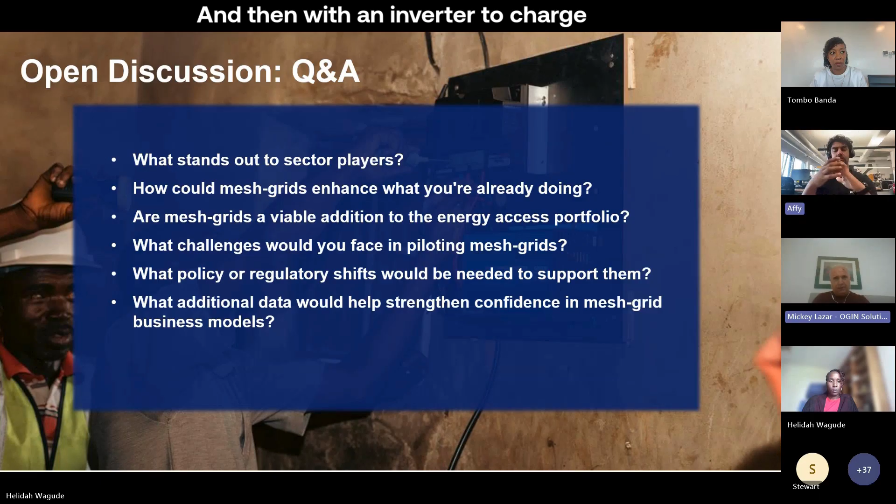for any power generation. And I wanted to ask the Okra team how they see the possibility to create charging kiosks that will charge an electric keke based on the mesh grid. Something like the surplus from all the households to be stored in a battery and then with an inverter to charge the keke.

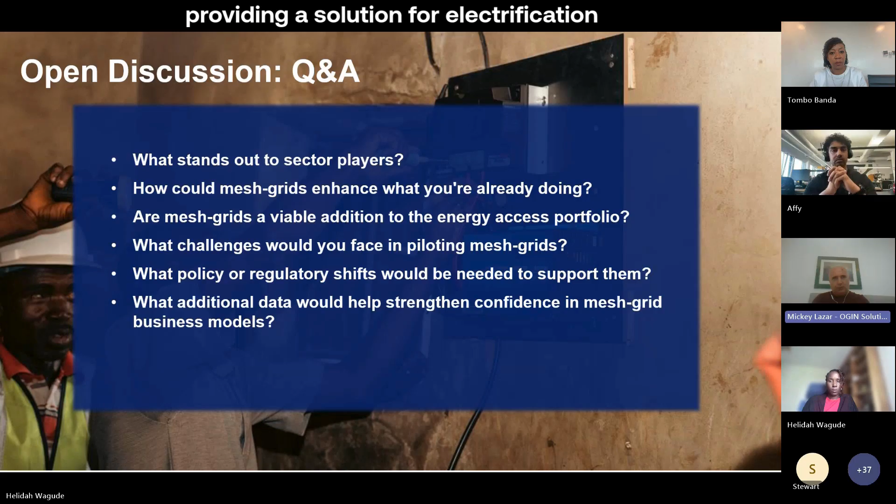On the other side, we deploy a centralized charging facility that already has capacities, and we can be very interested in deploying mesh grids around that location in the households around, providing a solution for electrification of that community. So I would appreciate the Okra team's opinions and views on this. Thank you. Nice. Thanks, Mickey.

What's the power rating of the charging for your keke? Around 2.5 kilowatt charger. 2.5 kilowatt charger. Okay, cool. So I think that's definitely an interesting use case. Under the current model, it would not work. As discussed, there was a demand for higher power use for productive use.

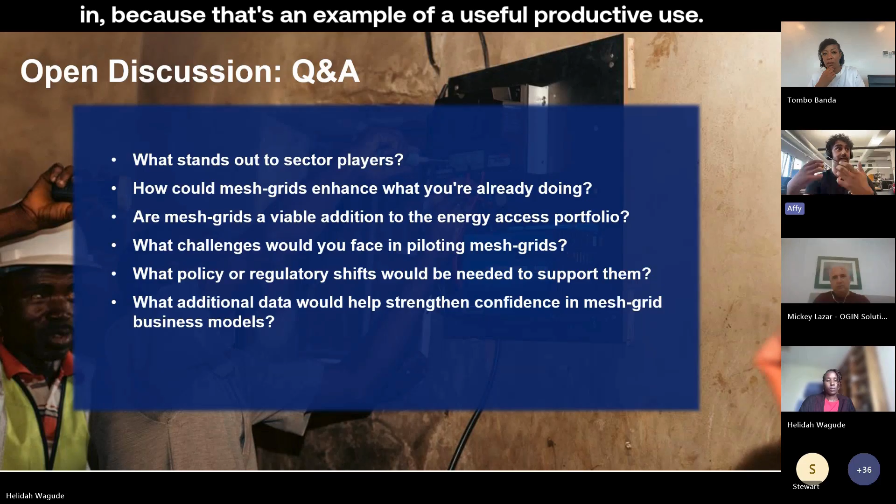And I think Stewart highlighted, where are these productive uses? Are they always there? So what you guys are doing would be great to plug in, because that's an example of a useful productive use. In order for the mesh grid to be able to supply that, we'd need to move to the hybrid inverter model that we plan on rolling out next year. But definitely keen to pilot it with you guys if that's interesting.

And in terms of application as well, I was speaking to Daniel from First Electric, I think he's on the call. He was talking about, in the next generation of his mesh grids, being able to put that excess power into these e-mobility use cases and then actually transport that excess energy from one mesh grid to another when there's need for it. So I think we could pilot something really cool at some point next year.

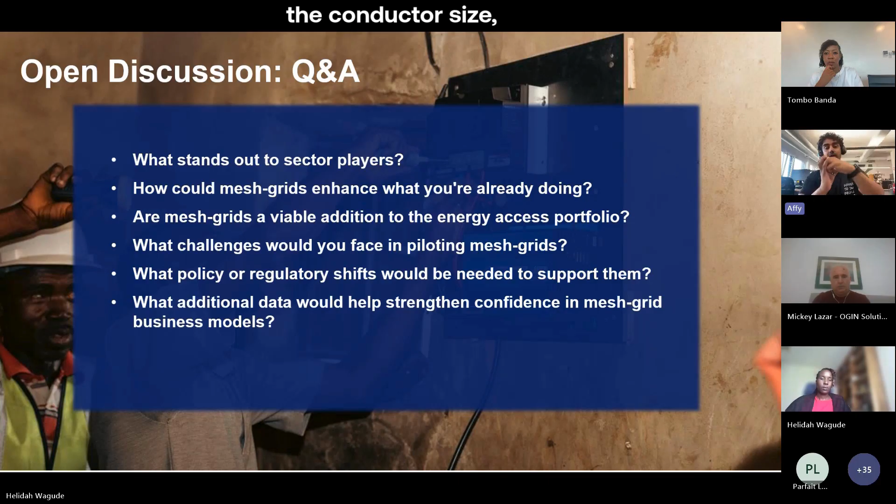And so imagine you have all of these interconnected solar generators. As soon as you're decentralizing everything and getting them to interconnect, you're reducing the total power that goes over the line, you're reducing the distance that the power goes over the line. So you can automatically significantly reduce the conductor size, which was our goal, to basically reduce the distribution cost.

So now the question is, go DC distribution or AC distribution? And actually what we found was that AC distribution, when you're doing it in a decentralized way, gets quite complicated because you're having to match the frequency and phase of tens or hundreds of distributed generators. And that leads to a lot of complications, especially when the loads get quite nasty, where you have a massive load coming on all at once, like a phone charging station with 200 phones charging at a single time.

I'll just quickly wrap up with this. On the DC side, the distribution works with quite a simple algorithm where, when there's a hub that wants to share power, because our grid is always operating at around 50 volts, it just signals to the grid like 52 volts. And that signals that it has excess energy.

And on the other side, if a node needs to pull power, it signals low voltage, like 48 volts, to the grid. And then the power just starts sharing. So by connecting on that DC line, there's actually no real complications. You just connect to the line where you want to share, and there's really no instability. It's a completely stable system. But again, feel free to shoot me a message if you want to dig in deeper on that one.

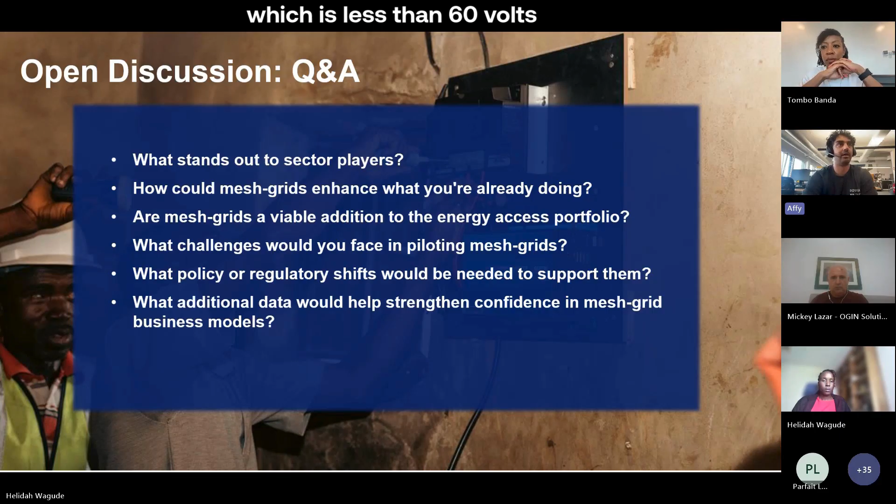So just briefly, these systems on the distribution side are all SELV, safe extra low voltage, which is less than 60 volts DC. And as I mentioned, we're operating at 50 volts DC on the distribution line. So it does not need to adhere to the grid code because it's not considered the national electricity grid or a mini grid. But we do still have to comply with a set of requirements and protection requirements that have been set by the REA under the DARES program in Nigeria.

Because there are AC loads at the household, there still needs to be earthing, MCBs and lightning protection. So all of that is still implemented. And again, if you're interested, I can share with you the site-specific requirements so you can check out the technical details. A long, 150-page document that you'll probably enjoy.

Okay, thanks, Affy. Tilen?

Thanks for this opportunity. My question actually, and perhaps I need to introduce myself. My name is Tilen Ogola and I represent Masiko. We operate a couple of mini grids in Ethiopia, targeting mostly displaced settings.

And to the Okra team, I think my question would be more on the numbers. Looking at the example you had in Haiti, where I think initially the distribution layout was changed to your current layout where you're thinking about more spoke and hub, and you talked about significant reduction in the capex, right? And initially you gave us figures around perhaps 15 kilowatt per month being more profitable.

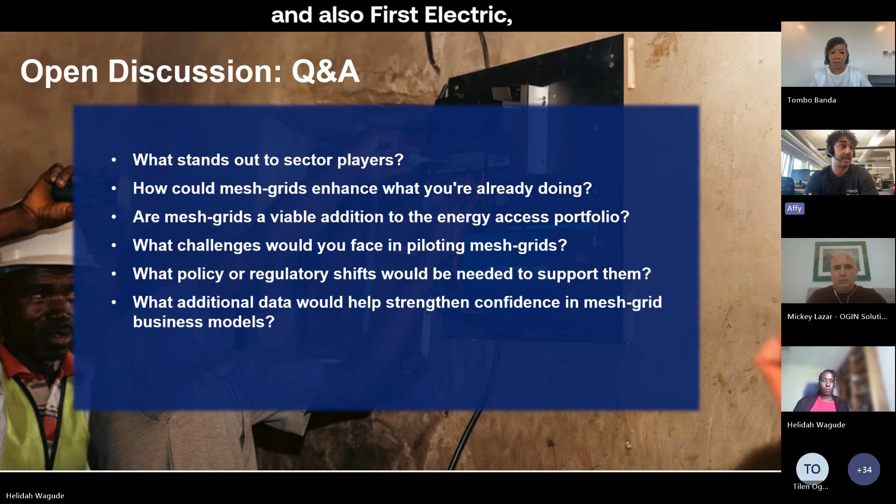Yep, that made sense. Sorry, I was just doing the calculation in my head from the latest model. Yeah, so basically, and I'm not the best because we're the technology supplier, right? The developers like Havenhill, who are on this call, who've done a massive number of deployments, and also First Electric, would be good to answer this if you want to get some more info from them.

But from my side, because we're working with a lot of our partners to actually help them get their portfolios financed as well, you're looking at a minimum of 4,000 Naira per month average revenue per user, as really the minimum, which is like $3.50 average revenue per user per month. And if you're not able to hit that, then you should really evaluate the site selection that's been done there.

And then when you can start ramping up to like double that, then you're actually looking at IRRs that are significantly higher than what Helidah and Tombo mentioned at the start of the presentation. You're looking at like 15-20% plus IRRs in Nigeria with the $300 per connection grant that's coming through. So I think now the time is really for the market to focus on how can we boost the revenue? And there's so many things.

One is we have to fix the connectivity because that's causing losses. The other thing is top-ups. If households aren't topping up, then you're just losing revenue. And the third one is, I think, appliance finance and productive use. And the developers are just getting better and better at stimulating that load.

I don't know if anyone from Havenhill is happy to share as well, but they've done a lot of really cool experiments in how you can actually bring productivity to the communities, which I think we all need to learn from, no matter what the technology is.

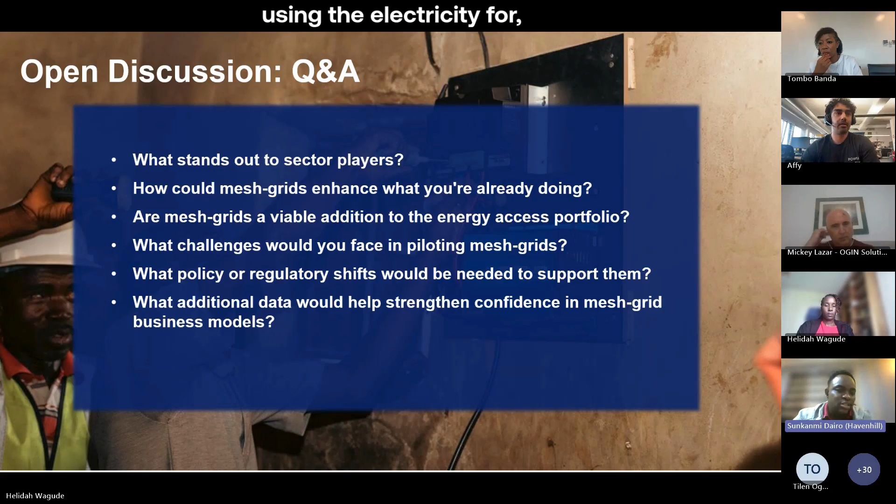And typically communities that are this size, you should be looking at getting at least 15 to 25% of the customers using the electricity for productive use. So that would also be a good number to guide your expectation and to guide any intervention that you want to use to stimulate demand. So have I answered your question now? Yeah, super clear, and thanks for that.